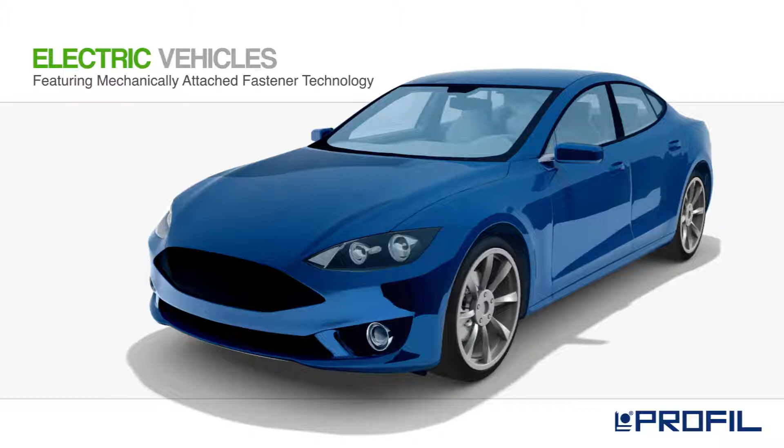Profil products featuring mechanically attached fastener technology, along with our Atlas brand rivet nuts, provide the ideal solutions for a number of electric vehicle applications.

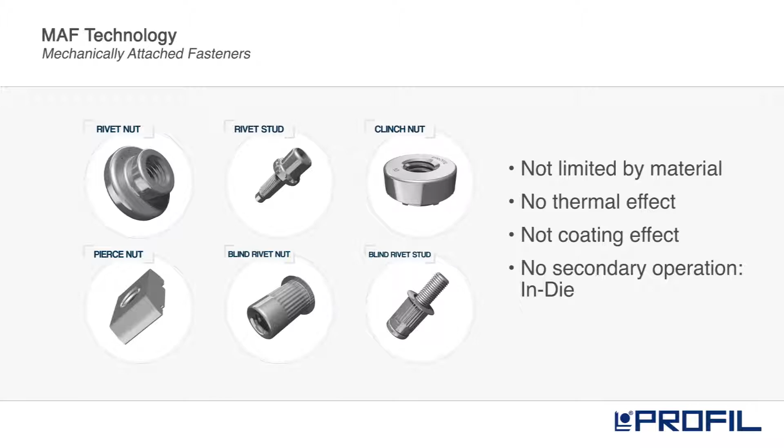Our mechanically attached fasteners can be installed directly in die into dissimilar materials and do not have the negative thermal or coating effects caused by welding.

Two types of Profil joints, the rivet joint and the clinch joint, each offer their own unique advantages.

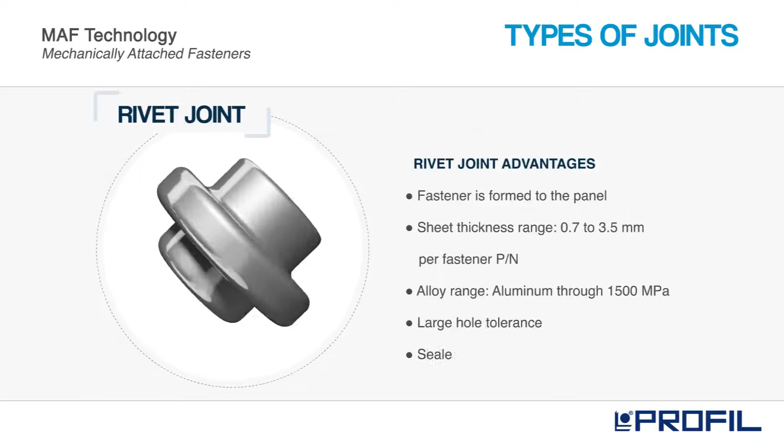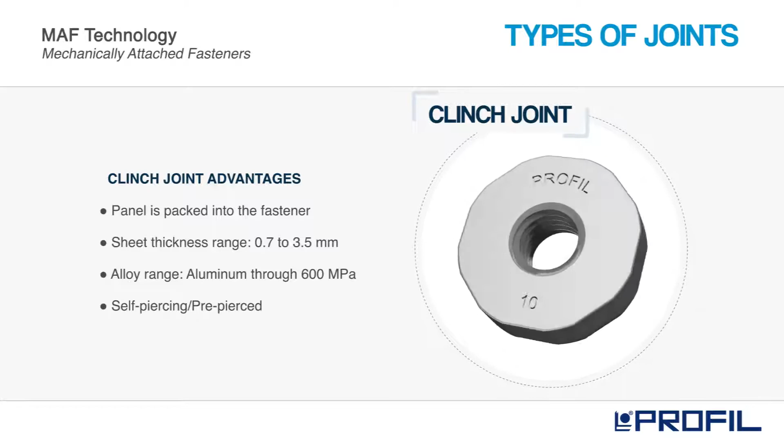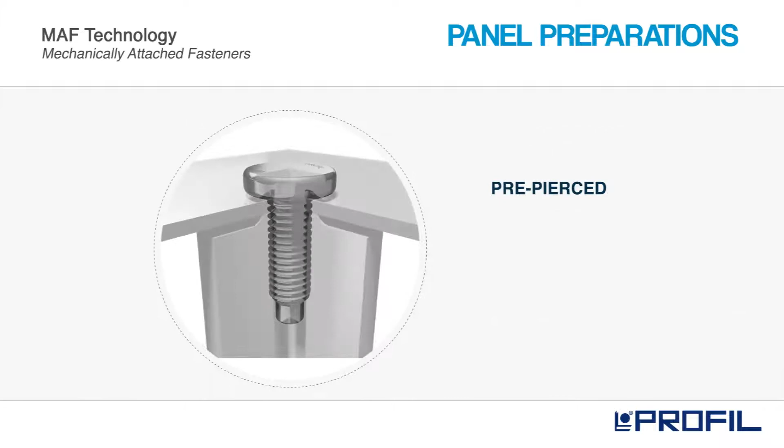For panel preparations, pre-pierce and pre-form as well as self-pierce are available. An example of pre-pierced fastener installation.

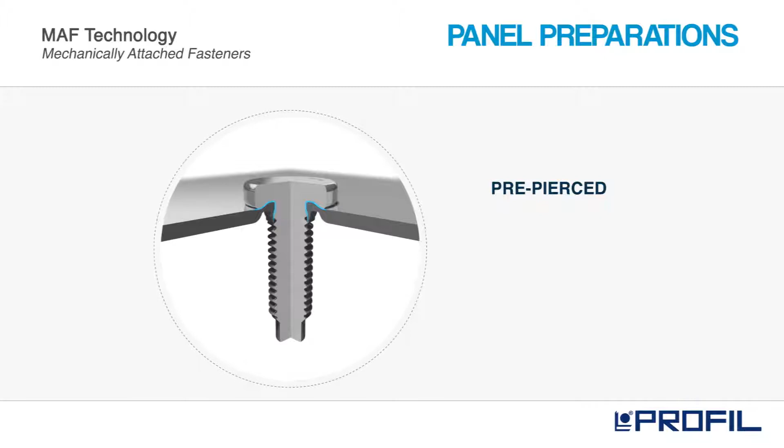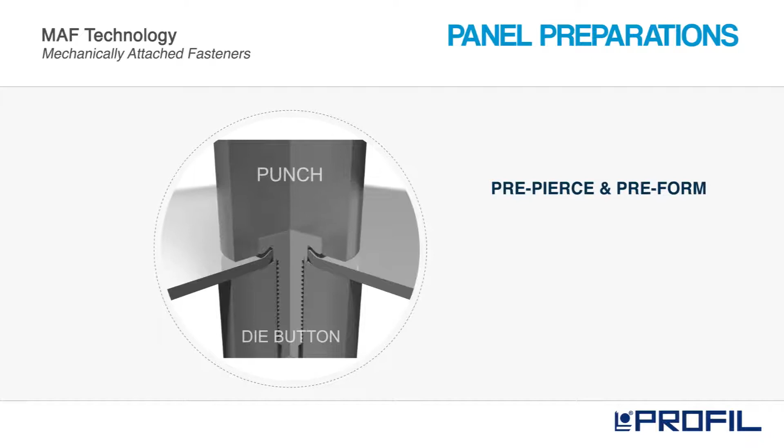Pre-pierce and pre-form fastener installation. Self-pierce fastener installation.

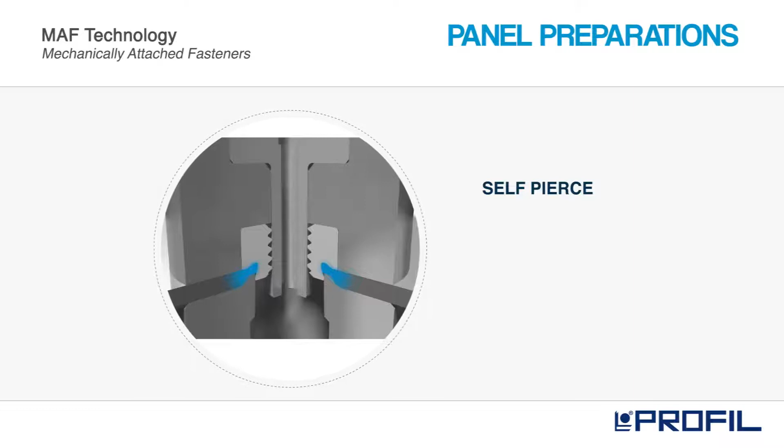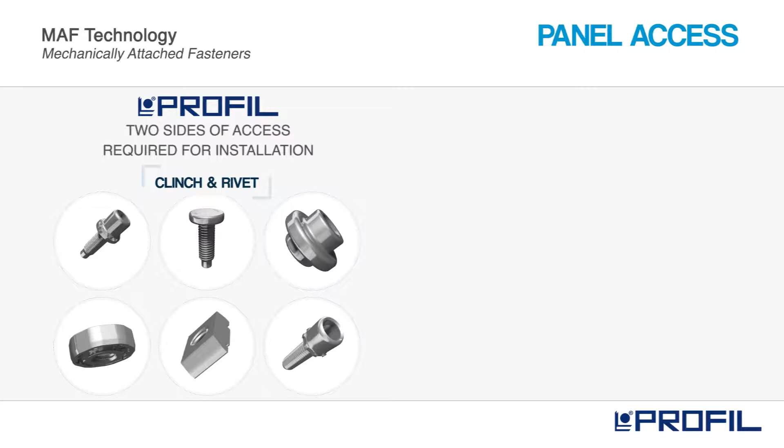For panel access, choose Profil clinch and rivet solutions when two sides of access are required for installation. Choose Atlas blind threaded solutions when one side of access is required for installation.

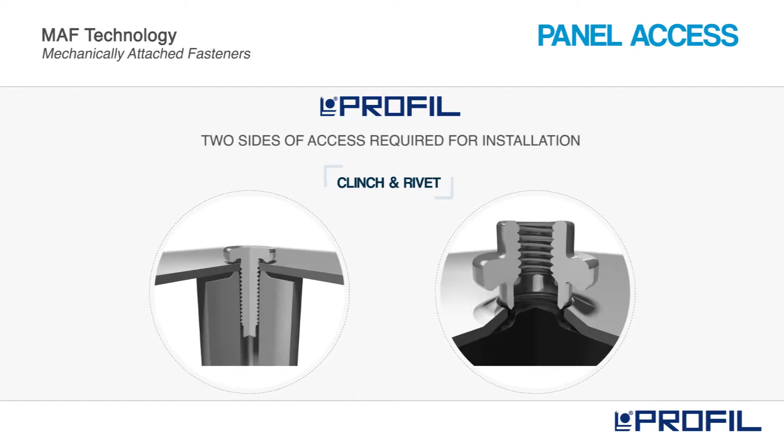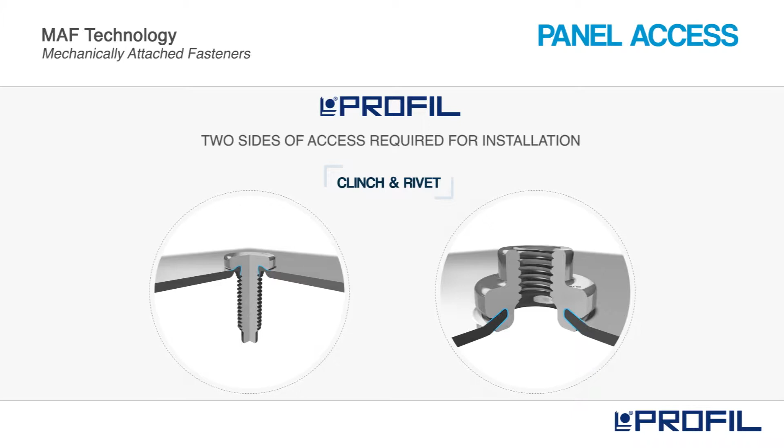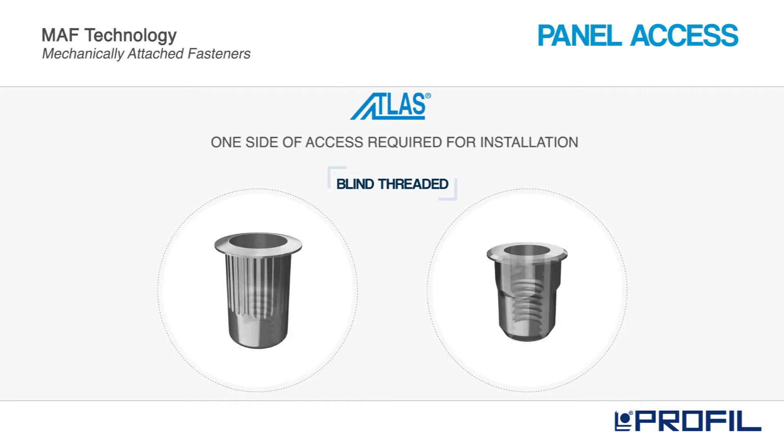Shown here are examples of Profil clinch and rivet installations. Shown here are examples of Atlas blind threaded insert installations.